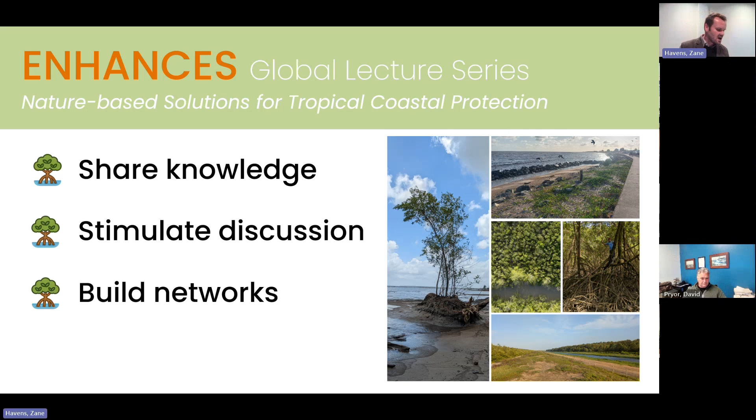So thank you all for attending. I will introduce our keynote speaker for today. This is David Pryor. David Pryor is an experienced waterfront engineer who has been practicing for over 40 years. He has extensive experience in the planning and engineering of marine facilities, including shipyards, ports, and military bases. As a waterfront engineer, Mr. Pryor has delivered projects for the US Navy, US Coast Guard, numerous port authorities, and shipyards. He has developed major projects in the United States, Brazil, Scotland, and the Caribbean.

As a resident of Virginia Beach, Virginia, Mr. Pryor has been deeply involved with the impacts of climate change, sea level rise, and coastal flooding. These projects have ranged from assessing potential flood impacts during hurricanes and nor'easters to the engineering of coastal structures to mitigate damage or inundation. Mr. Pryor holds a Bachelor of Science degree in Civil Engineering from Worcester Polytechnic Institute and a Master of Science degree in Engineering Management from Old Dominion University. He has also been certified as a coastal engineer by Old Dominion University and is an ASCE Fellow. He serves on several ASCE committees as well as PIANC Working Group 213, design guidelines for marine multipurpose ports.

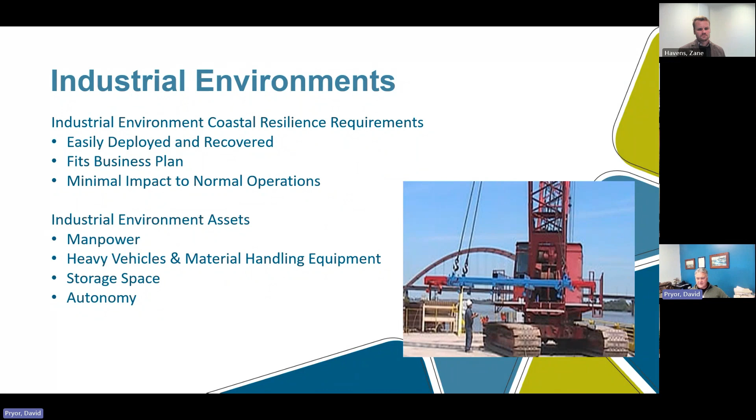They can move assets as necessary, whereas a town or a city cannot simply close a neighborhood because it's become dangerous. People live in that neighborhood. They need to get in there to get their family out. You can't simply shut an area down, whereas these facilities do have that space, decision-making capability.

The common solutions, of course, are retreat, elevation, hard defense. Of course, today we're talking about natural defense. And one of the things I always advocate in industrial facilities is operational policy changes. Those are often the most cost-effective. Now, what I want to look at with each one of those is how likely is it to be a solution in an industrial environment.

Retreat, well, a shipyard pretty much needs to be on the water. So retreat is not truly an option for them. Likewise, an elevation change has limited opportunities. You pretty much need to have your pier at or near water level. Your warehouses cannot be elevated but so high above that pier, so on and so forth.

Hard defenses certainly have potential within these environments. Nature-based defenses, this is where Zane challenged me and made me think, is there are opportunities, but they're limited. You got to find your opportunities there, and we'll touch on some of those later on. Most importantly, as I said, operational policy changes.

Case in point, I was working with Georgia Ports some time ago, and they have a large facility where they import autos that's also subject to flooding. And I asked them, well, what do you do when you see a storm event and that area is going to flood? Their answer was, we move the cars. It's that simple. They just find another facility to load them out. Same thing with the shipyard. They can just move everything out of the way, or they can decide we are shutting that area down for 3 days while this storm passes.

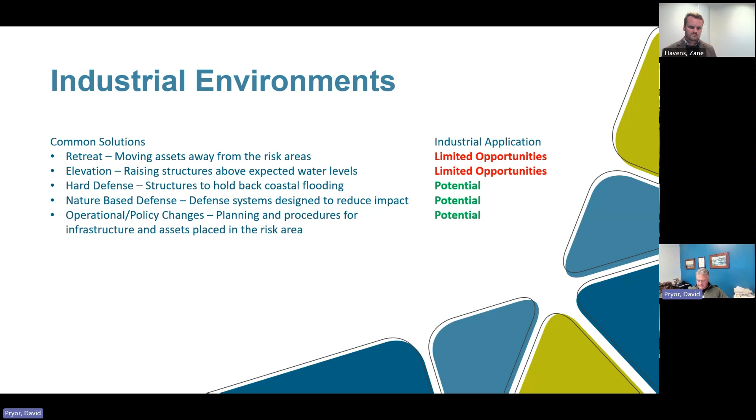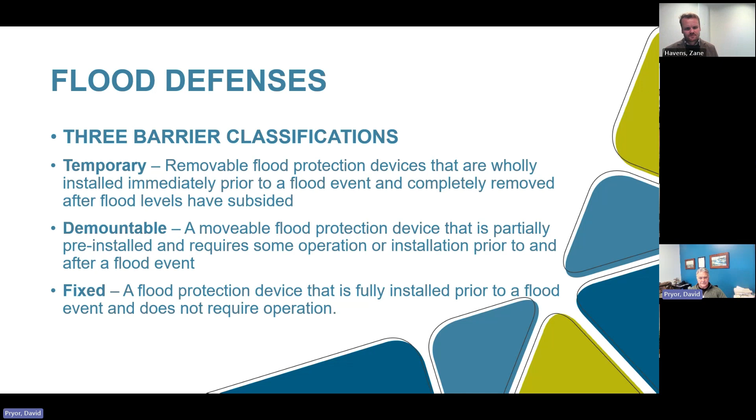So let's look at some of the common flood defenses that we often use in industrial environments. There's three types of classifications that I use: temporary, demountable, and fixed. Temporary means you put it down during an event, you pull it back when the event is gone, and return to normal. Demountable means it's somewhat permanent. There might be some human interaction to deploy it. And fixed is something like a flood wall, etc., that is in place permanently, and you just have to work around it. So let's look at what these look like.

Temporary flood barriers, as you can see here, this is a large bladder. These are water filled. The advantages are quick and easy to install. They don't require a lot of storage space. You can use a small team to deploy it. As I said, many shipyards, ports, military facilities, they have the personnel they can devote to this when they see a storm coming. Small tears can also be repaired while it's in service, and of course it's reusable.

On the other hand, you're restricted in the height and width that you've got. It can be damaged. Tears can lead to failure of the entire system. It does require a very flat surface, so that might require some preparation of grade beforehand. Other problems, such as if you don't dispel all the water, it can deteriorate it. UV radiation can wear it down. Water freezing the tubes can lead to failure. So there's upsides and downsides to barriers like this.

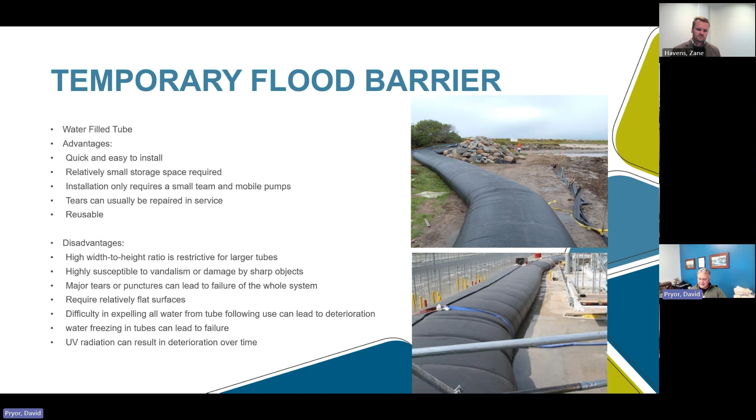Oops, sorry, I went a little too fast there.

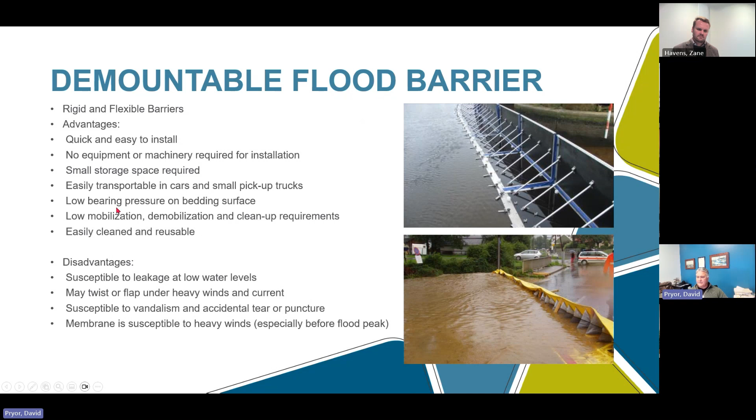They're great where you need to have an intersection, a roadway, or what have you. And last but not least, I want to cover fixed flood defenses. As I said, that's a seawall or something like that. It's permanent, it's reliable, very low maintenance, but it does require a contiguous defense system.

Disadvantages, they're probably the most expensive option. As I said, it probably needs some sort of contiguous system, which means a mechanical gate or something to that effect. It is an impact to the environment. Quite frankly, they're not very attractive. So now, of course, in an industrial environment, attractive is not the highest requirement.

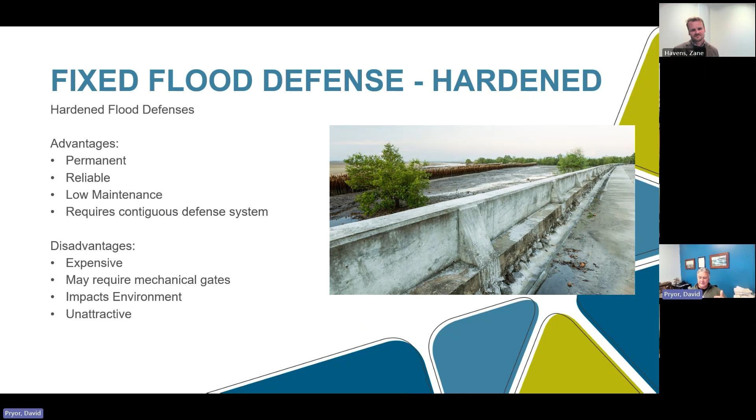Now, with that being said, usually it's a combination of these defenses that we can rely on. Of course, this purpose is to talk about nature-based defenses, and here I'm talking to the choir here. The advantages are they're inexpensive, they're low maintenance, and it obviously reduces the environmental impact.

The disadvantages is it does take up a footprint, and it takes time to mature, and in many cases, it's just a partial solution. On the other hand, all the other traditional defenses I presented are partial solutions. There's no singular way to solve these problems. Usually requires a combination of these.

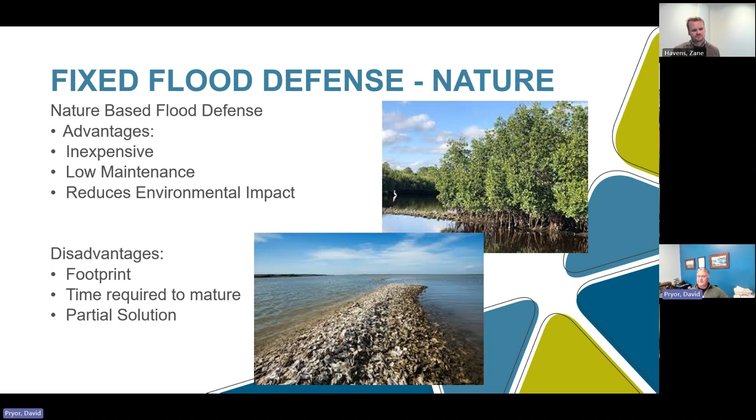So let's look at incorporating this into industrial environments. As I said, this is, to me, a challenge because you've got to have all the right elements come together to deploy a nature-based solution. So the first thing that comes to mind is shoreline protection. That's where we have more of a natural shoreline, and what we want to do is prevent erosion, prevent flooding, etc. Typical methods of doing that: living shorelines, breakwaters, and riprap.

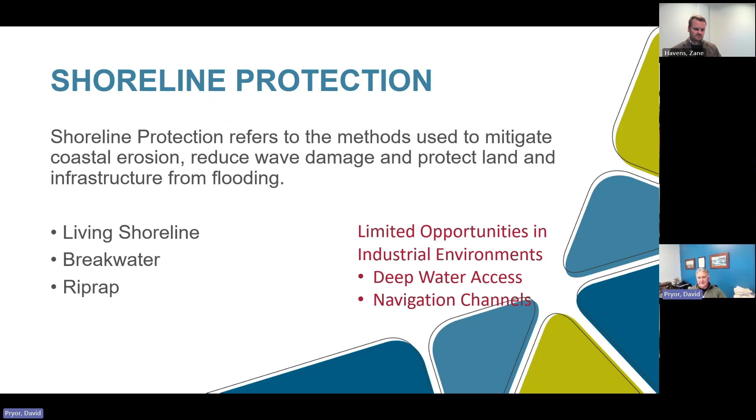The problem with industrial environments is you very rarely have a natural shoreline that you're protecting. But there are opportunities. As I said, most industrial environments, you need deep water access and you've got navigation channels to contend with, either close to your facility or at least an approach channel coming in. That limits where you can put nature-based solutions.

Of course, I'm sure most of you are familiar with living shorelines. The concept here is that on the outer area, you have a breakwater of some sort. It could be a coir log, it could be rubble. This is to take the wave energy down. Once you get inside of the coir log, we transition up into this area where we vegetate it with subaqueous vegetation, some that's partially submerged in a tidal marsh, and on up to your upland.

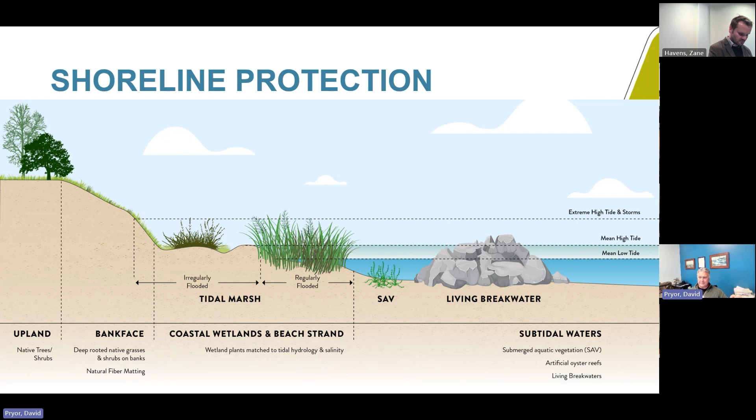And the idea is that as sea levels rise, this vegetation can migrate up to shore and provide constant protection to the shoreline. This really relies on a shallow water environment, which, as I said, it's rare to find in industrial environments, but I can give you an example of where we could use an application like this. I just brought up this one photo to show you what a living shoreline looks like once it's in operation. And you can see, very flat, very wide, very shallow.

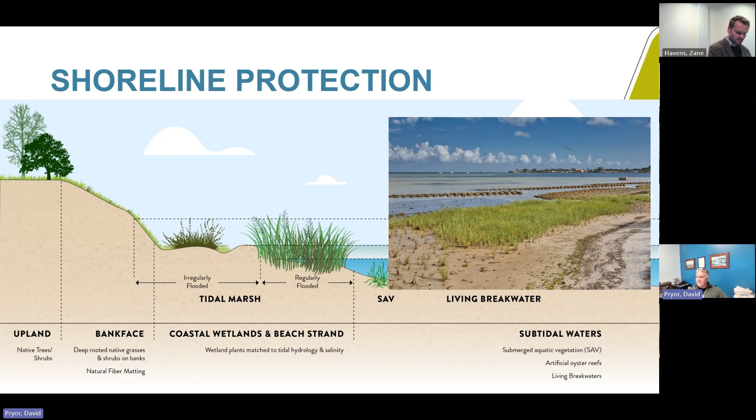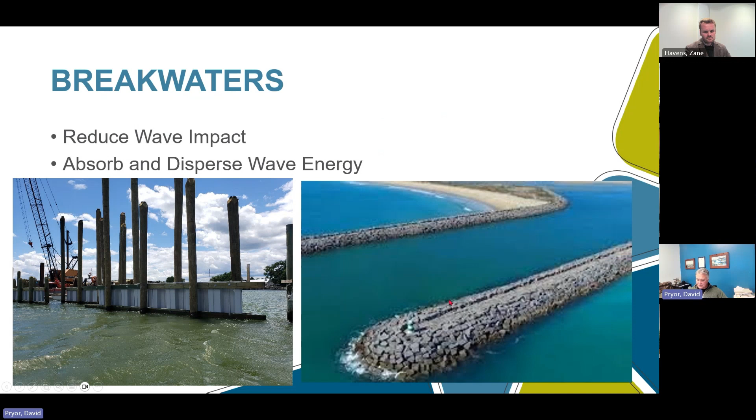Breakwaters are another example. These are some examples that I've shown. This is a sheet pile breakwater. Here we have a more traditional stone breakwater. Another facility near here, Newport News Shipbuilding. This is on the James River, not far from the facility that I've shown you. In fact, that facility that I showed you a moment ago was right here. Now we're looking at Newport News Shipbuilding, which is this area here. On the James River, it's subject to 14 miles of fetch.

As a matter of fact, I was at this location yesterday, fairly windy day, and there were quite a few whitecaps right out here in this area. They do some vessel loading out that requires very still water, as well as they're not particularly fond of water coming over the bulkhead and impacting their facility. So this gives us an opportunity. You can see here that while there's deep water, this dashed line you see here, this is the federal channel.

So clearly we don't want to go out in there, but once we get out of the federal channel, it gets down to 7 feet, 9 feet, 2 feet. So we have the opportunity here to insert a nature-based breakwater of some sort. I know mangroves are one of the things we talk about. Virginia is not exactly conducive to mangroves, but there are other options we could look at. The same concept as the mangrove, but some method to take the wave energy out.

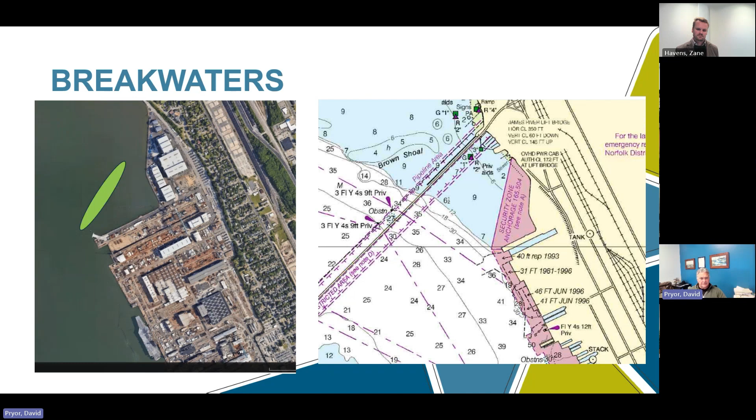It's not particularly deep. We wouldn't be blocking navigable waterways. So there is another opportunity for the establishment of a nature-based solution, as opposed to building a sheet pile breakwater like I showed in the previous photo. Moving along, the considerations with that is, of course, we don't want to be a hazard to navigation. So anything we build has got to stay clear of the navigational channels, as well as looking at the traffic that does need to access the facility.

In a case like that, we might want to look at a sediment transport study to see how that's going to interrupt the flow of sediment down the James River. Is it going to accrete sediment behind that breakwater in front of it? Is it going to start directing sediment towards the navigation channel, which will then require additional dredging? Those are some of the considerations.

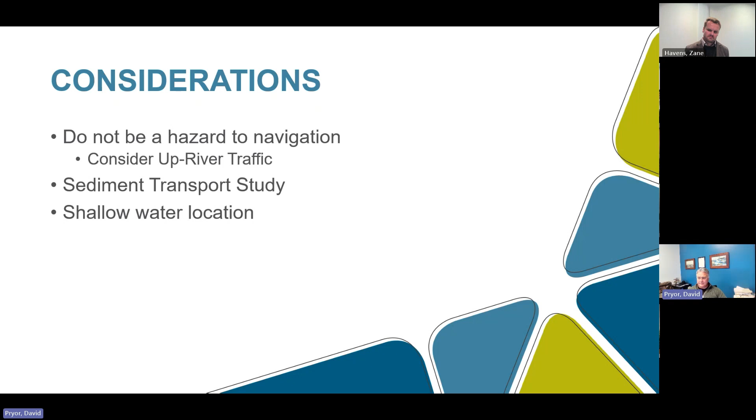As I mentioned, of course, a shallow water location, because building a breakwater like that in, say, 20 or 30 feet of water is now going to require 60 to 100 feet of width and quite a bit of buildup. And that would further add the time as we stabilize that whole mound, if you will. So those are some of the considerations that would go into an application like that.

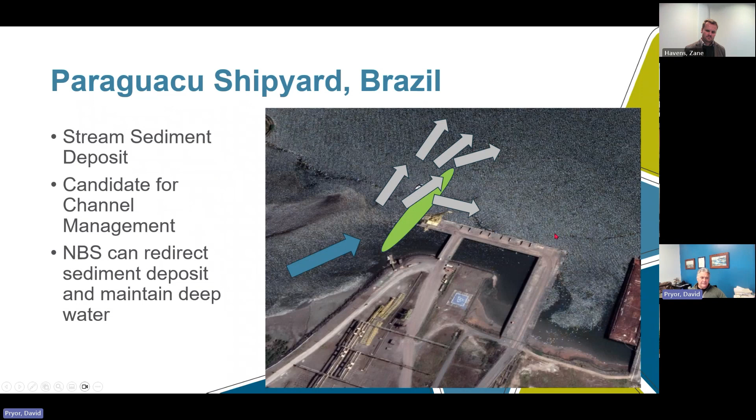So to me, this is a good candidate for channel management. Nature-based solutions can redirect that sediment deposit, maintain deep water, and then provide all the environmental benefits of the nature-based solution. So let's take a look at how that would work. If we build that breakwater, what have you, something to channel the water further outward, it's going to just disperse the sediment further out as opposed to right in front of here. It's a fairly wide river, so once it gets further out, I'm sure it's going to get picked up and moved down.

With that, again, the considerations: let's not be a hazard to navigation. We have to consider the upriver traffic. In this particular case, there's one facility just a bit to the west, and then it's pretty much jungle after that. So there's not a whole lot of development further up the river that we're interrupting. We'd want to look at a sediment dispersion study to make sure that we are projecting the sediment as we think it's going to go.

Coordination with the neighbors is always a nice thing. As I said, there's a facility right next door. Let's make sure we're not interrupting their operations. And with any sort of implementation, you want to coordinate with city, state, federal plans to make sure it fits the bigger picture of what they're trying to accomplish. In this particular location, because they are fairly isolated, I don't think it would be a big impact, but we never want to assume that things are not going to be an impact.

Another thing to consider is nature-based solutions to protect the facility, what I call beyond the gate. So often we're looking at coastal flooding, sea level rise, storm surge, as it impacts us from the water in. But a lot of facilities, they're protected at the waterline because they're on bulkheads, they're elevated up 2 to 3 meters above the waterline, which is generally safe. However, their access roads in could be the issue.

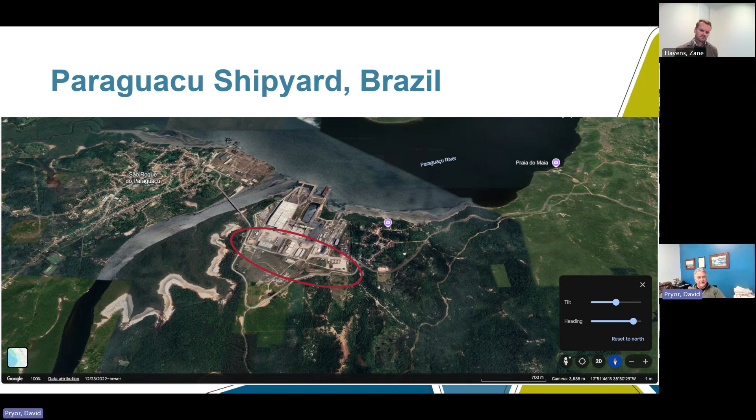While they're protected more or less from elevation on the riverside, here's where they could be impacted because if this floods, personnel cannot get to work, your supply chain is interrupted. Now they have issues on the backside. The facility's fine, just nobody can get in or out. So here we have the potential for backside flooding.

Again, we can look at some nature-based solutions with a raised berm, vegetation. By placing these in strategic locations, we can protect this facility. Now, as I mentioned much earlier in this presentation, one solution is not usually the silver bullet for everything. So here we might also want to consider combining it with mechanical structures, maybe a few automated gates that tie into a raised berm that protects the facility overall.

Again, this is one example. Here, they do have the wide footprint for something like this. We could also design, instead of these gates, a raised roadway where it just goes over at that location and protects the facility. And of course, we also have to look at the total protection. If we need to extend these further to the northeast, that's what we have to do until we get a relatively safe elevation.

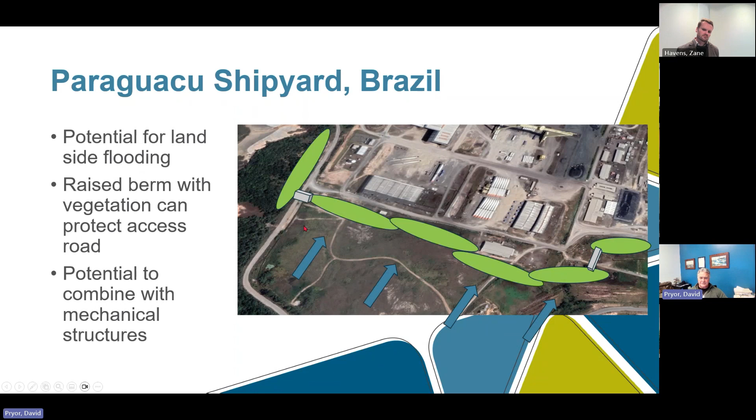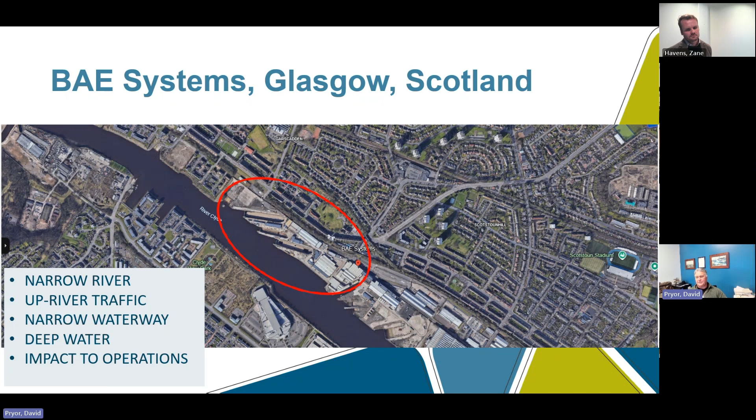Another facility, Colonnas Shipyard, I worked there many years ago. As you can see, this is the Elizabeth River, just downriver from where I showed you Norfolk International Terminals earlier. Again, very narrow river. There's considerable upriver traffic in these facilities here. Another congested waterway. It's very close to the federal channel, so deep water. And again, a big impact to their operations.

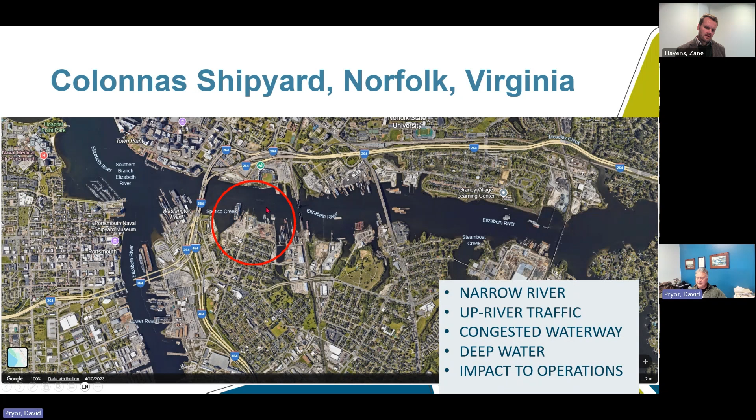It would be extremely difficult to work in any nature-based solutions, except maybe up here where you see Spottico Creek, that they could do some protection in that area. But as far as the waterfront, they would be hard pressed to do much. So with that, one of the things I try to wrap up: I've done this presentation for many shipyards and other industrial facilities previously, but not with the nature-based solution focus.

But what I always try to encourage any of these facilities is, number one, consider operational changes before you go making physical changes. It's simpler, it's less expensive, and often really does solve the problem. With an industrial facility, we want to consider the downtime and recovery time. With that point, nature-based solutions are a good player to address both of those, if combined with other techniques, mechanical gates where necessary, etc. Of course, you have to coordinate any resiliency plan with neighbors, city, state.

We want to use available labor and resources. In industrial environments, to construct, say, a berm, a mangrove, usually you don't have the right labor there, but that's not a showstopper. That's a specialty construction that facility simply doesn't have. Of course, we want to monitor tide and storm surge. That goes back towards operational changes. If you can predict when you're going to have flooding, you know when and how to deploy your resources.